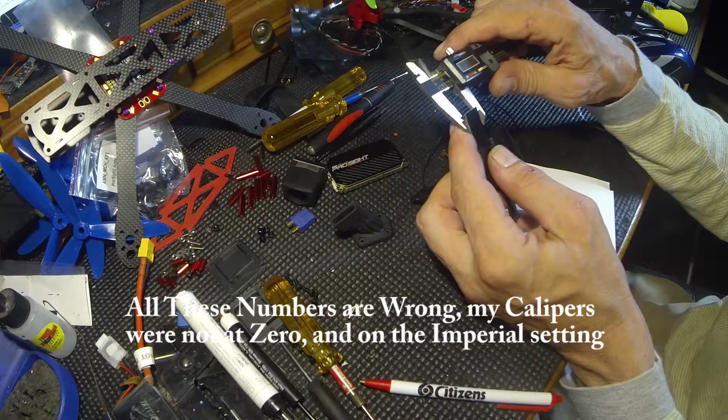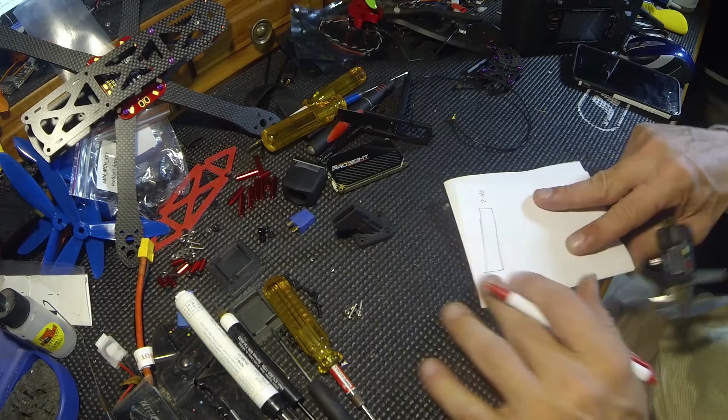So I'll first get my calipers out and I'll measure the piece that I'm going to use. And this says 7.46, and I'll write that down. Kind of draw a picture of the antenna, and 7.46, right? And then we'll get its length. And it's 27.6.

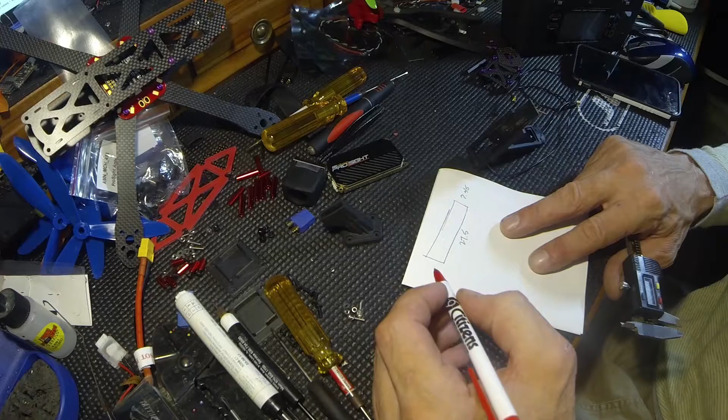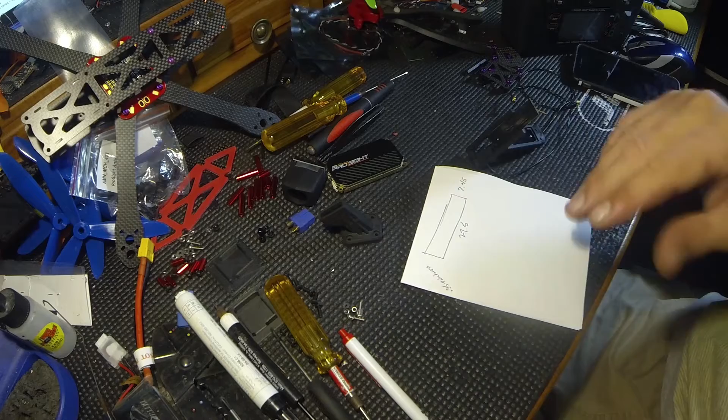And the thickness, 0.35, let's say. 0.35. And thickness. So I got two of those. I'm assuming that the other one's identical, so I'm going to put this back together so I don't ruin it. Boom. That's it.

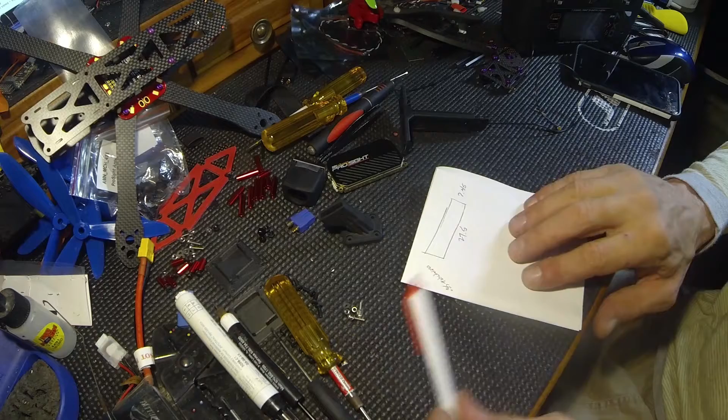So let's say we wanted to do a V. You know, like we'd have both of these come down at a 90-degree angle to each other, but both come down on a 45-degree angle. Something like that, right? And both antenna wires can be at the bottom, right? See how these things attach here?

It's a blob of epoxy holding it on. So we can either put that blob of epoxy on the inside or the outside of the bottom of these with the wire coming out, right? It'd be easier to put them on the outside when you slide them in. You get what I'm saying? See, I can slide it in from the outside, but if it was on the inside, I couldn't get this next one past it. Alright, you get me? So that's quick engineering right there.

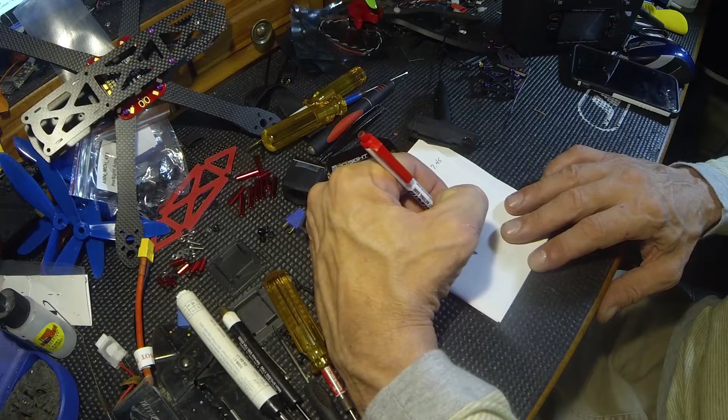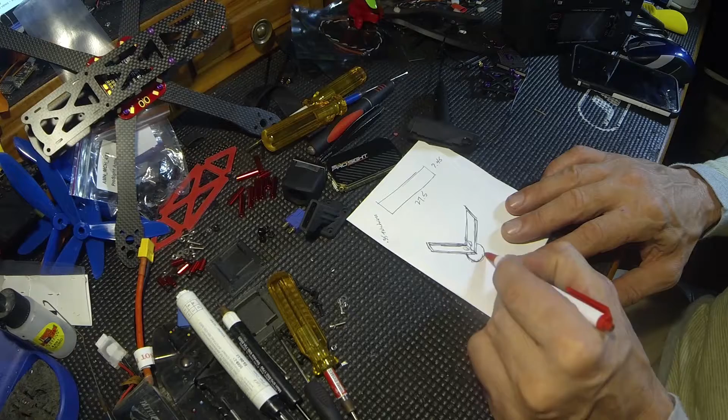So I'm going to build some kind of box around this to house the antenna itself, similar to what they got here, right? Then it needs a foot. You need some kind of footprint to mount it to your copter. Alright? Okay, I drew a straight down view, like as if you were going to 3D print this part. Something like this, right? And you can't protrude past here or it'll be hard to print, okay? Either front or back, whatever it is, you know.

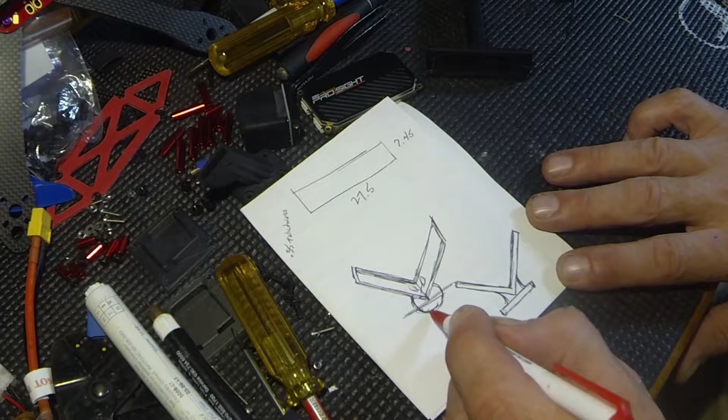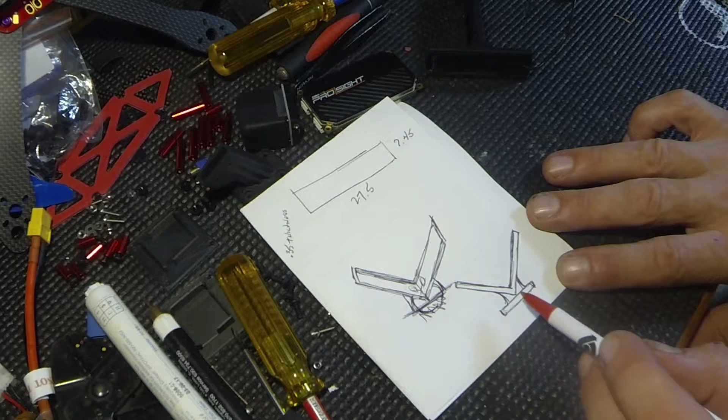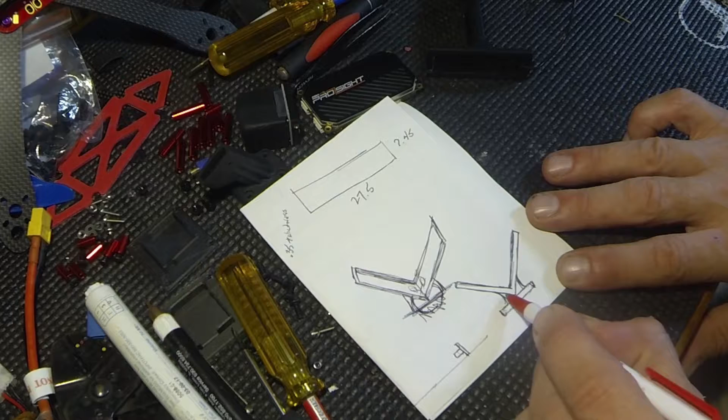So it's better then to make this a rectangle or of the sort, and you'd have to get rid of all of this because it's going to sit on the printer flat. Okay, so let's imagine this is the printer bed. This will sit on the printer bed similar to this. Here's the bottom piece, right? Then you have your web to the V, this web to the V, then you have the V itself, right? And so that's kind of how that will look laying on the printer bed.

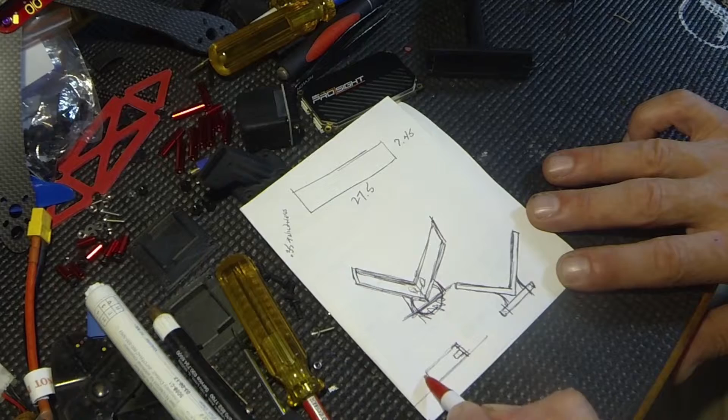You got me? Of course there'll be holes here to mount it to the copter, and then a T formation so you can slide your antenna down in there. Okay, well, now I'm gonna start up a software program and show you how to go about making this.

Okay, so here is a free program. It's called DesignSpark Mechanical. Go there and check it out. It's a great program for free. This is like the best one out there.

So we're gonna start building this antenna thing. So we're gonna do a new design. We're gonna look at this in the plan view because I showed you that drawing I made, right? So we know that we're gonna have a base rectangle. Let's say we'll do it 30 by 4. How's that? 30 by 4.

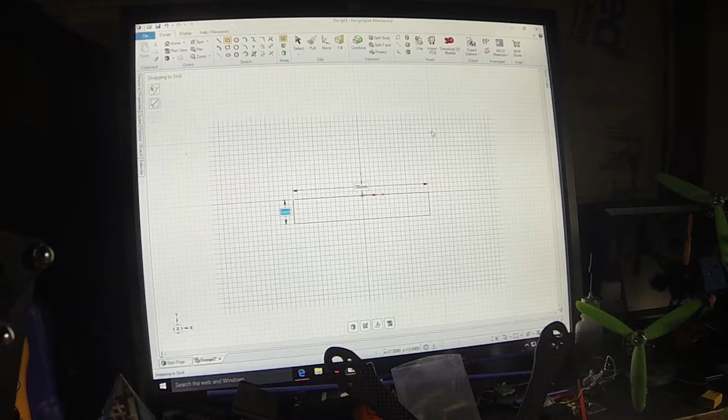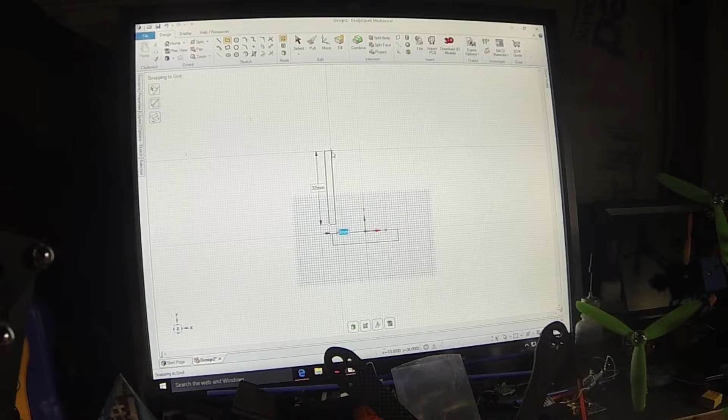And then we're gonna put this V in, and it's 27.6. So we're gonna draw another rectangle. Let's say 3 by 27.6, and we're gonna make it 28.5. 3 by 29. There, that's perfect. And we're gonna do another one just like that. 3 by 29.

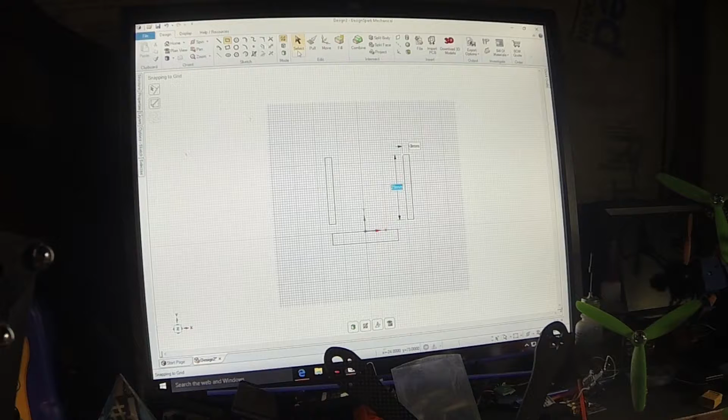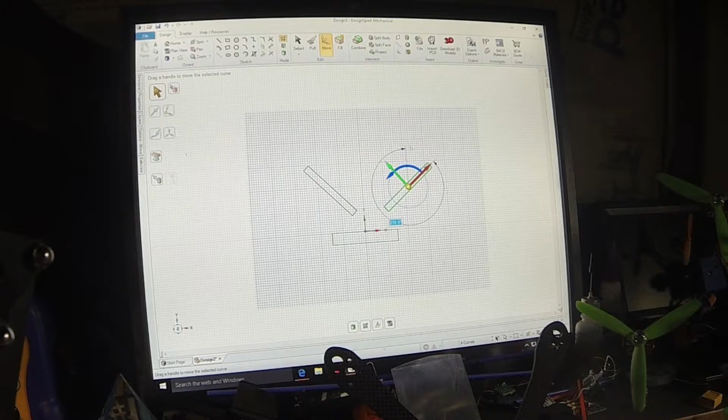And then we're going to select this one. We're going to move it. We're going to rotate it 45 degrees. And then we're going to select this one, and we're going to rotate it 45 degrees. Come on. Okay. Then we're still going to want to move these. So we'll select this one again and blow up a little bit.

Okay, so this is the rudimentary of it. I'm going to move this one over till it's almost in the center there. We're going to go 3, enter. Then we're going to move it down till it just about touches the deck there. Let's go with 7, enter. Then we're going to select this one and do the same thing to it. I mean, not the same increments, but you get what I'm saying. So I just went to an even number. This says 10, so we'll go 10, enter. And then we're going to bring it down to 7, enter.

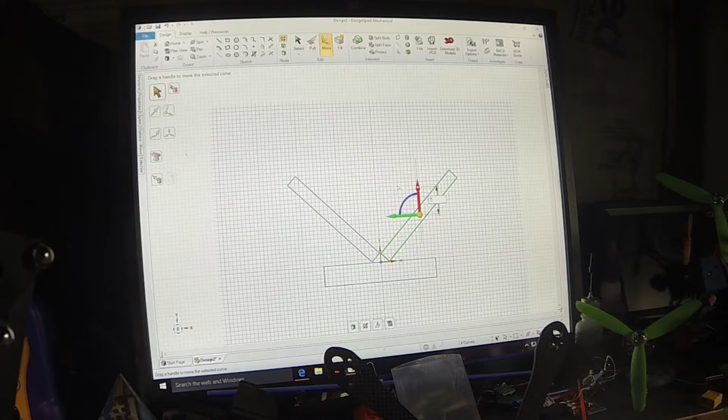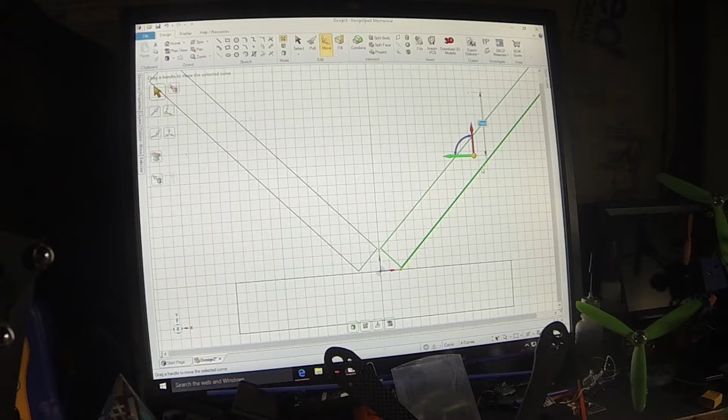Then we'll blow it up in the middle here to see what we really got. And I kind of like that. A little bit of space everywhere, right? You don't want to not have any space there, right? Okay. But this means that the antenna's got to slide in from the top. Now, that's okay. It's okay that the antenna slides in from the top. That's perfectly alright. We just need somewhere for the wires to go. Okay, so we got our rudimentary shape going here.

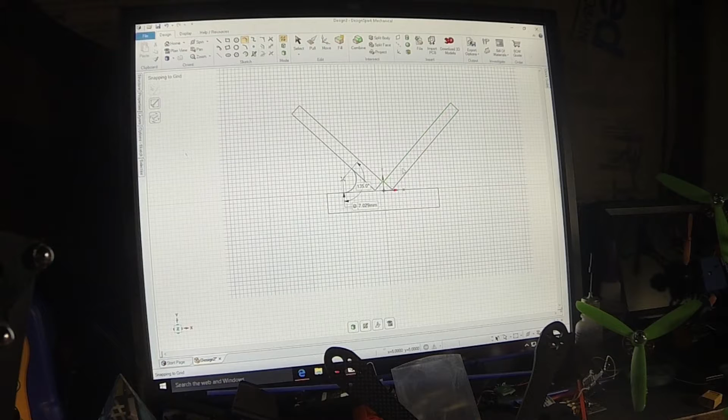I'm going to put a tangent arc in here from here to here, and then another one if it'll let me from here to here. Okay, and then we'll make this little corner, this center part, a little tougher. So we'll do another one from here to here. Okay. Alright. I'm kind of digging that.

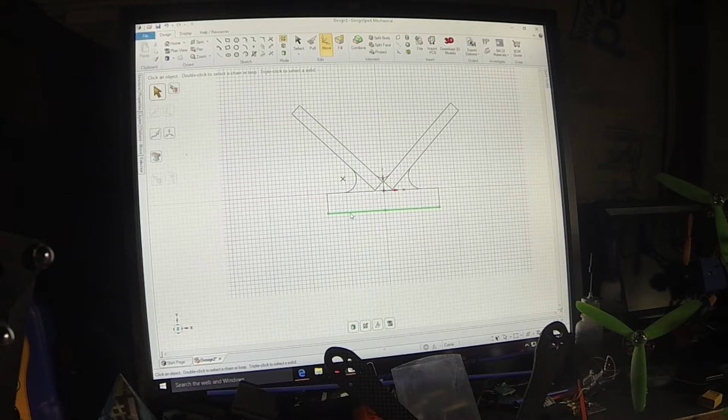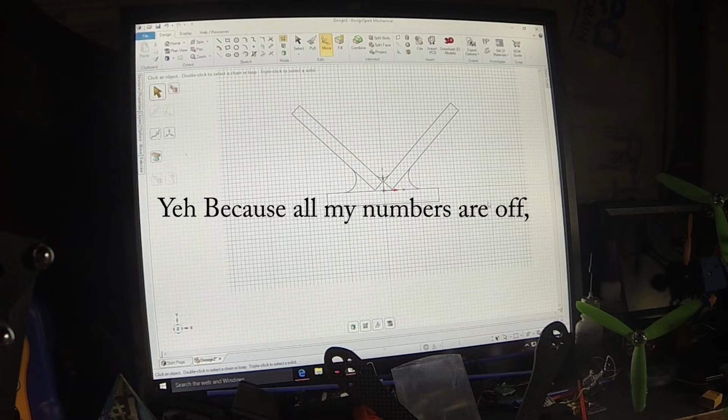I don't think this bottom needs to be 1, 2, 3, 4, 5 mil thick. So we'll move this up to 1.5, and that'll leave us with 3.5 mil right there. Right? God, look at how much smaller this antenna is than this big thing Connex gave you, right? We have 1, 2, 3, 4, 5 to the mark. 1, 2, 3, 4, 5 to the mark. I don't think that needs to be that big either, so we'll move this in 1, and then we'll move this one in 1.

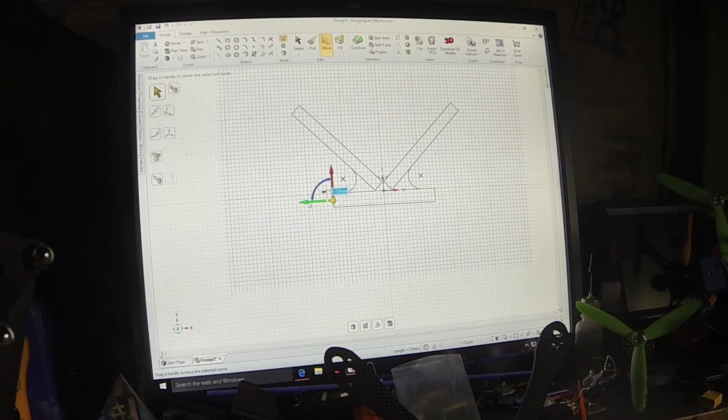Okay. Then we're going to go to the pull menu and the home view, and 7.45 is the width of that antenna. So 7.45. Let's go with 8.5. Okay, so what we're going to do is we're going to take this one and this one, and we're going to raise it 8.5. 8.5. Enter. You got me?

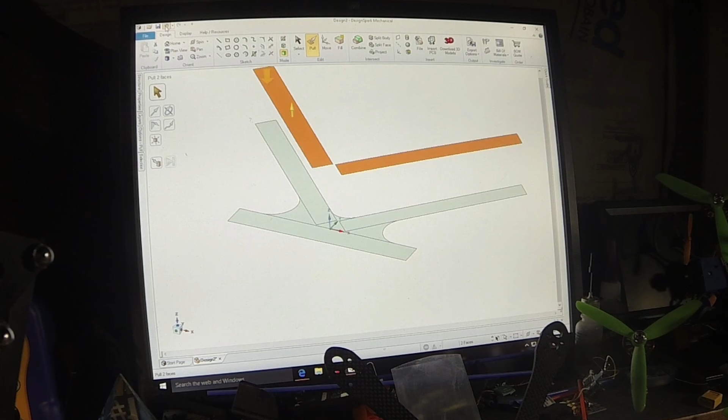Oh, it didn't do it. Control Z. Undo. Pull. There we go. 8.5. Enter.